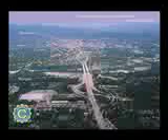So let's look outside of the highway for a second, and let's see it in context of our city. It's an incredible opportunity, and let's take an opportunity to plan. If you look at the original plan of Asheville from 1925, they actually were dealing with expansion of the community, but they were expanding Patton Avenue as retail out to West Asheville.

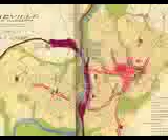They were considering bike paths along the river, as well as community parks along Beaucatcher, but they were seeing the whole city growth in context and in relationship to itself. We have to do this in the future of Asheville today.

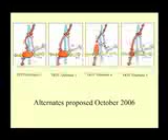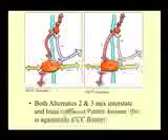So these are my really sophisticated planning drawings of the DOT alternates that are on the table. The big orange circle represents conflict points. So on alternate number 2, you can see here that DOT's alternate number 2 took I-26, this red line, and connected it north near UNCA, but they kept the existing condition of 240 and Patton Avenue on the Smoky Park Bridge the same.

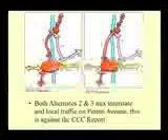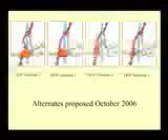They did that again for alternate number 3, and then the community in the year 2000 said, 'We don't like that, could you please change that?' So they came up with two other alternates that separate 240 from Patton Avenue in both cases. Because the community said to DOT in 2000, 'Please separate interstate and local traffic,' we agree with that. We think alternates 2 and 3 should be off the table. And alternate 5 was removed by DOT back in September.

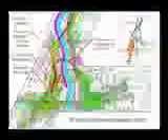There is a positive element on the east side of the river before Hillcrest. They take 240 and peel it northward. We felt that was an opportunity to help gain this land back out of our right-of-way and into our tax base, help connect Hillcrest into the community as opposed to being moated off from the rest of the world.

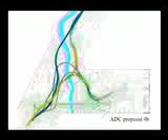So that's our proposal, is to basically say, here's DOT's proposal. That's all of the asphalt they're proposing in blue. Here's Westgate Plaza, here's the river. UNC Asheville is off the map up here on the north. Here's Riverside Cemetery. We just basically made a straighter line. So that's a comparison contrast between their proposal and our proposal.

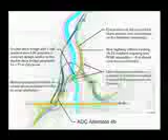We also have local connections, doing a connection between Emma Road and Riverside so that you don't have to get on a highway to cross the river. There are very few bridges north of the Smoky Park Bridge to connect our community. This is an opportunity. We also have this very sophisticated model made out of roofing foam.

Here's the idea of our connection. What we basically did is put 240 on top of 26, hence the double-decker bridge. This dotted line is the path that DOT wanted to take. Our goal was to basically minimize the footprint and try to do it as efficiently as possible.

Our other goal was to make Patton Avenue local and make it the true boulevard that it wants to be. One of our ideas is that in downtown, here's Beaucatcher Cut. From Pack Square to Pritchard Park is a 2-minute walk. Most of downtown is a 5-minute walk from center to edge. Could you make Patton Avenue every 2 minutes?

Could there be a new square or plaza? Could you make Patton Avenue the Champs-Élysées or something like that? This is a way to rethink Patton Avenue. This is happening all around the country.

This is in Fayetteville, Arkansas, and we actually purchased these images because we felt it really conveyed Patton Avenue in West Asheville. You can go any part of Patton Avenue and it kind of looks similar to this. And this is all with the smoke and magic of computers.

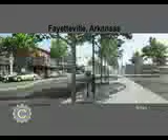What if you added wider sidewalks? What if you encouraged buildings to move up against the street? Could you change the context of Patton Avenue and make it grow up a little bit and become a true downtown to West Asheville?

And in Fayetteville, they went so far as to steal our Vance Monument. But there it is there. It's providing these visualization tools to the community that these are opportunities for us, but we have to articulate them and we have to fight for them.

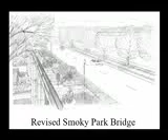This could be Smoky Park Bridge. Once you removed Patton Avenue from it, you now have a lot of extra asphalt up there that you can add sidewalks, bike lanes, bus rapid transit to. You can do a lot of things to that bridge because it's over-designed for a local road.

We're growing. Asheville's growing. Buncombe County's growing. We're expected to add 80,000 people by 2025. Where are they going to go? Do they all just go out into the county and do we sprawl out, or do we try to densify into downtown Asheville? Our master plan for our community actually calls for the project area to be a village.

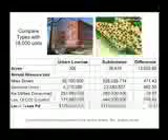Now, how do you build a village if you're taking the whole area out with right-of-way? So we're trying to say, condense the highway and build some real estate close to downtown that provides housing opportunities. This building right here on the left is the building at the northeast corner of Merrimon and Chestnut Street. It's a little apartment building. We all know it across from Deal Motor Car.

If we were to build 300 acres of the project area with that building type, we would house 18,000 units close to downtown. Now, there are other benefits that go with that. People drive less miles. They consume less kilowatts of energy. They produce less CO2. So urbanization close to downtown areas actually has other environmental benefits to it.

Now, if we took those same 18,000 units and developed in a suburban pattern out in the county, that would consume 40,000 acres. So the question to all of us as citizens is, how do we want to grow into the future? Are we going to sprawl out and consume as much land as possible and exhaust that resource? Or are we going to try to grow smartly into the downtown and densify? That's one of the other issues we're bringing forward with this project area.

Now remember, I'm talking about a highway. How does this area grow from a tax standpoint? We're all Buncombe County taxpayers. This is around the current per acre value to the county at tax base.

It's currently paying about $5,000 per acre per year to the county. What we're promoting is that if it does grow up a little bit - the far right here is a downtown property, actually this one right here across the street from Malaprops, that pays $250,000 per acre per year to the county in tax base. What we're hoping is that our project area may not be downtown, but it could be close. This is the benefit to having this real estate on our tax base and not just shoved off into

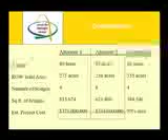right-of-way. We also do a lot of really exciting and boring numbers. We've analyzed a lot of different stuff, and this is what it breaks down to. Again, option 5 is off the table now. But DOT is proposing 89 acres of asphalt and 273 acres of right-of-way at a cost of about $371 million. We're proposing less than half the acres of right-of-way, less than half the acres of asphalt, so we're hoping it's going to be less than half the cost. But that's in the current evaluation process right now with FIGG Engineering.

We feel that it makes our community more livable, it's more sensitive, it saves land, it saves time, which would hopefully save money. And the whole point for us, and an ongoing frustration after yesterday's headline, has been articulating that this is about land consumption.

For us, these are the most important and critical points. When DOT came to present to our community in June, when they presented our alternate down here, you'll notice what they just talk about - construction costs. They didn't put in land value. They didn't put in future return on taxation. They didn't put in those other value points that help us make the decision, and it was terribly frustrating. For us, the investment is in the land, and don't eliminate the location.

We've learned from other communities - this is a house in San Francisco, with some pretty awful looking trees in front of it, but notice how they sell this house. It's $16.5 million because it's got a view of the Golden Gate Bridge. The Golden Gate Bridge is just a highway across the bay, but because it's an engineering feat, because it actually has some aesthetic quality, it adds value back to the community.

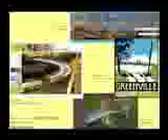Greenville's figured this out. It's on the Convention and Visitors Bureau website, it's on the city's website, it's on the parks website. And this is my favorite - it's on the History Tour logo. The thing was built two years ago, and it's part of Greenville's history.

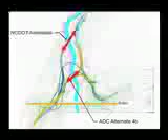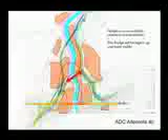For us, the location is pretty prime. Here's our location here - again, here's Westgate Plaza, here's Smoky Park Bridge, here's DOT's proposal. All of their crossings are way up here. This is the real estate that would probably see the DOT's bridge, while in our impact, it's more real estate because of the topography - more people will see our location. So design needs to be really important.

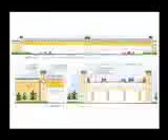Aesthetics and engineering - the way that they get separated by DOT is they generally create a committee group to jazz up a bridge. So here's the bridge, and DOT will select the bridge, and then they'll hire a committee or contract a committee to come up with the bridge color. Maybe you get a little sun symbol or a planter. But to me, and to folks in the design center, it's really not hitting the aesthetics of engineering - it's just pulling something off the shelf and gussying it up with paint.

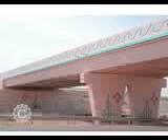And this to me is no different than putting graffiti on a bridge - it's just, oh, there's a roadrunner down here and a little sun symbol, but it's just the same bridge as some other off-the-shelf bridge. It's not truly engineered for the site. And how is that different? Design should really be for the location. We understand this through engineering - you look at a suspension bridge, and what's really beautiful about a suspension bridge is it's telling us what it's doing. It's taking the forces of gravity, pulling them up into the air, and then driving them down these pilings. That's it - it's just form following its function.

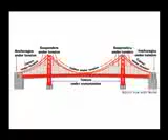This gentleman here, Santiago Calatrava, has made his name as a world-renowned bridge designer. And when he designed this bridge, no one knew him. He basically looked at the site and said, well, I've got rock on one side, I've got mud on the other. So notice what he does: he puts all of his engineering on one point. He lets the earth tell him what to do.

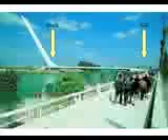And then he figured, well, if I'm suspending this whole thing, I could fill this steel box full of concrete and just lean it, and the whole thing just pivots on the rock. The beauty of that engineering expression is that it's telling you what it's doing. There's no extra frou-frou to it. It's not painted pink, and it does its job.

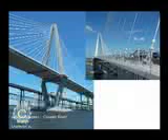In Charleston, they built this bridge, the Cooper River Bridge. They've got nice wide sidewalks with bike paths, and this bridge, they actually celebrated in its community. They have marathons across the bridge, and it's on their logo materials for their community. We need to have that same kind of signature quality for Asheville.

Again, you'll see here that for the sake of purposes we were trying to make a straight line, and we came up with this double-decker concept. We're also talking about doing land bridges capping over the highway.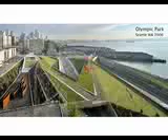In Seattle, they actually created a park that's kind of Z-shaped that connects the downtown to the waterfront. That park is a sculpture museum with some Calders and some Richard Serras. Not only does it go over a highway, which is right here, but it also goes over a massive train line that leads to the industrial waterfront. So all of the uses are taken into consideration in the design of the city.

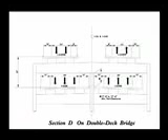Now, there's a lot of language been given to the double-decker bridge. When we first came up with the concept, it was merely to make the smallest footprint possible. DOT was contracted to take a look at it, and this is how they designed it—this is their double-decker bridge. Here's 240 up here, and here's 26 down here. This is a cross-section cut through the bridge like a loaf of bread.

When we saw this in the presentation, we're just like, okay, you have 17 feet clearance from top slab to bottom of structure—that's okay. But why is it 37 feet from slab to slab? That means the structure of this bridge is 20 feet thick. Is that really necessary? If we looked at bridges around the world, I mean, this is a bridge.

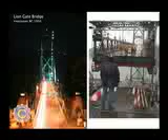Here's a bridge cut in half right now. That red beam is holding the bridge up. There's a human being, so this is the structure. That structure is not 20 feet thick, unless that human is 19 feet tall. So how is it that our bridge is 20 feet thick in that situation?

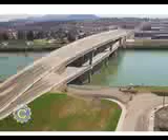Basically it's because they pulled an off-the-shelf design and stuck one on top of the other. It wasn't engineered for the location, and it caused inconsistencies in the design that they could add value to the community.

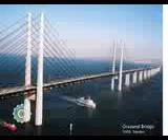This is a double-decker bridge in Sweden that's about 2.5 times the span of the French Broad River here, and the structure is 7 feet thick on the upper deck. So they've done it elsewhere. Why couldn't our DOT solve that?

The city and the county got together and anted up $35,000 apiece and joined a team with our organization to hire a bridge engineer to engineer our double-decker bridge solution. I don't know if I'm downplaying this, but the city and county got together and put in money together on a project.

They really should be commended for stepping forward. It really was an amazing thing that the city basically anteed up right there in the meeting and said, we'll do $70,000. When the county found out about it, they said, oh, wait a minute, let us get involved. It really made me feel great as a citizen that happened.

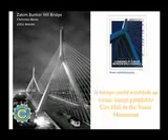They ended up hiring FIGG Engineering. FIGG was involved in a number of bridges. This is the one in the Bunker Hill Bridge in Boston that's part of the Big Dig. Again, it's on T-shirts and posters. When you go to Boston, it's their icon now. This is a bridge that they've built in the Natchez Trace.

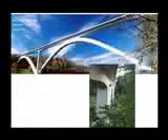It was phenomenal when Linda was making her presentation to our community. She pointed this bridge out, as well as this bridge. We're all familiar with this one. This is the Linn Cove Viaduct on the Blue Ridge Parkway.

When they built this bridge, they invented that system that you see being used here, where they built the bridge suspending it off the existing bridge, and they patented it. The way she talked about and presented this bridge, she said, well, you know, when we were building this bridge, what we thought would be really nice was not cutting up the mountain and building it in a way that was sensitive to the landscape, but also making it blend in as well as possible.

So we cut a piece of the rock and figured out its iron content and mixed that iron into the concrete so it would blend in better. Then we invented a system of building the bridge and patented it. It was really amazing. It's like it was always an opportunity for creative solutions, and they didn't see things as impediments or problems.

Then she said that the National Endowment for the Arts gave 5 awards to bridges in their entire history for design merit. So 5 awards from the National Endowment for the Arts were ever given to bridges, and 3 of those 5 awards went to FIGG Engineering. And they're currently looking at our bridge. We're pretty excited about that.

So this is the opportunity, not only to have a village this close to downtown, but to have a bridge that has some added value to the community.